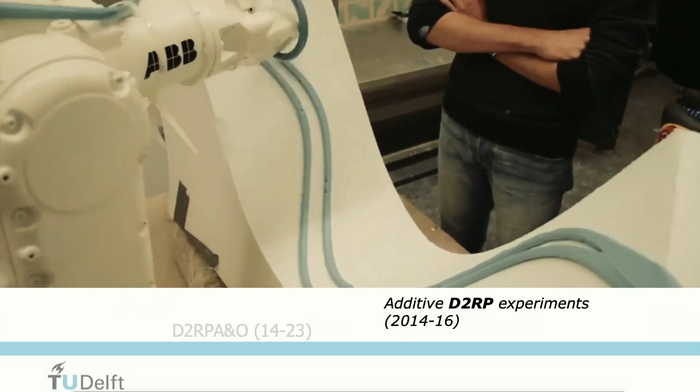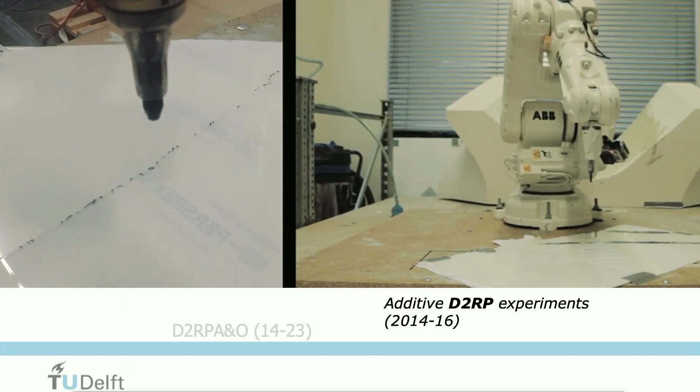But usually what we do, also in this case, we followed the same principle. We selected a fragment of the pavilion, as you can see here, structurally optimized it, and created a Voronoi-based pattern. Here you see a drawing experiment with this first pattern.

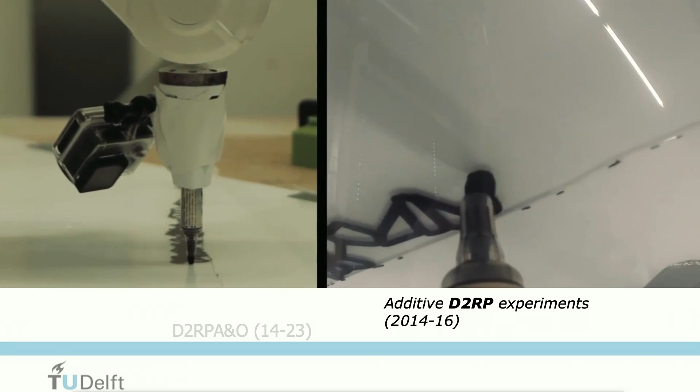You see that the cells, the Voronoi-based cells, are at the moment drawn separately, while when you 3D print, you want a continuous path. So this was the next step, creating this continuous path and 3D printing a one-to-one prototype. This was basically the first experiment that we implemented in robotic 3D printing, and here you see the optimization routine that we implemented.

So why do we use this material design? We use it because it reduces material use and also 3D printing time. But also at the time we were speculating that probably it increases insulation properties, but we didn't know if that's correct. Later on we indeed also tested it, but I'm going to get back to that when we get to the project where we did that.

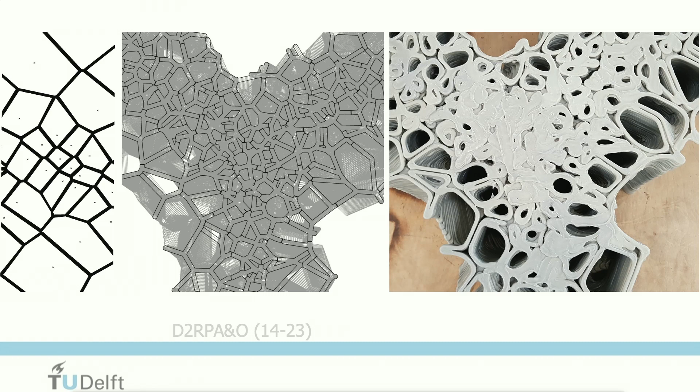So this Voronoi-based material design is very versatile. In this case, we 3D printed with thermoplastic elastomer in collaboration with an industrial partner in Rotterdam, and we 3D printed a chaise longue with variable stiffness. What does it mean? The back of the chaise longue leans back when the user is leaning back.

Again, we implemented the structural optimization and also the material design in such a way that the higher density parts are stiffer than the other ones. Here you see the system that we used for 3D robot printing in Rotterdam. And I think I'm going to go there because the sun is blinding me.

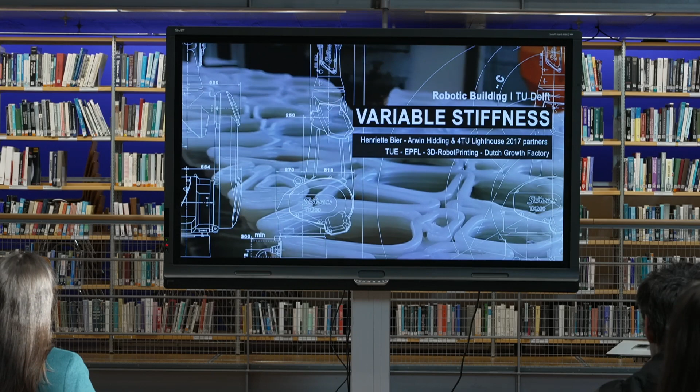Again, we usually use Rhino Grasshopper to develop the design. Here you see the cellular design that we then tested, first on fragments, and at the end we 3D printed the whole chaise longue. So the logic is quite clear: higher densities means it's stiffer.

Here you see the 3D printing process. It took about 30 hours in one go. Here you see the researcher, very dedicated. He spent basically the 30 hours next to the system, and 30 hours including troubleshooting were implemented. And here you see the variable stiffness.

Continuing basically on this line of thought, structurally optimizing, 3D printing certain parts, but also having, let's say, subtractive, not only additive but also subtractive techniques implemented, we developed a project where we worked with curvilinear beams consisting of recycled wood, and we 3D printed the nodes, optimized and 3D printed the nodes.

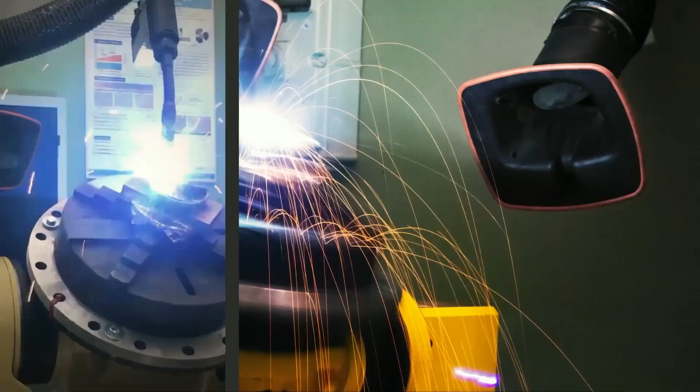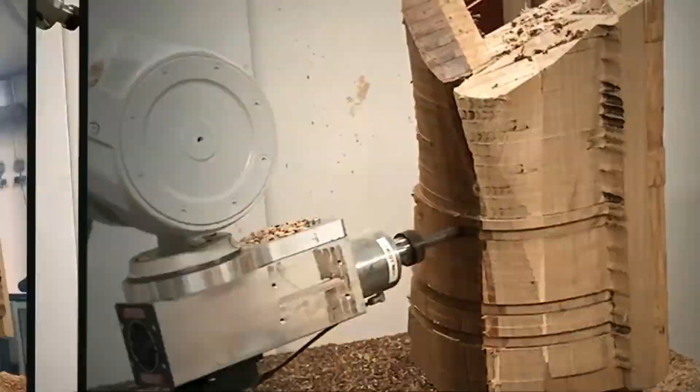So this is still work in progress, but in principle, the technology is, as mentioned before, available here at mechanical engineering. So again, how we did it: we took recycled wood, we glued it together, and then we milled these curvilinear pieces.

Again, it's a fragment, but it has been quite impressive to see that the various pieces of wood, with their different colors and patterns, have an aesthetic quality, I would say.

So what we identified, of course, was that we created a lot of sawdust. So then the question was, okay, if we want to have a complete circular loop, we need to use the sawdust.

And then we developed a project, this one here: planetoid. We call it planetoid because it's a small planetoid that is 3D printed from wood, a combination of wood and thermoplastic elastomer. This project, as mentioned before, was implemented with a landscape architect. The idea was that this cavernous structure is harboring not only animals and insects, but also a ball of earth from which plants can grow.

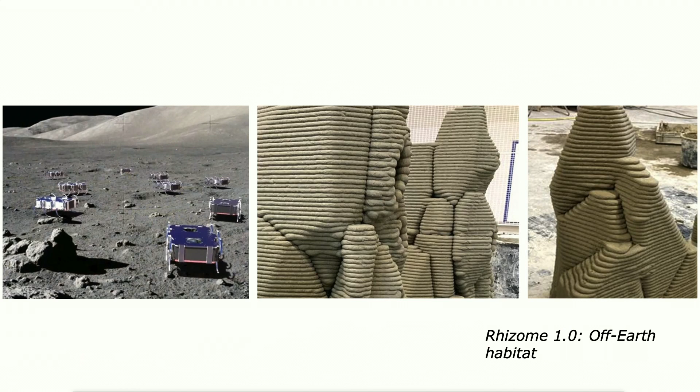Master students actually explored scaling up this approach. They proposed a larger scale urban furniture based on the same principles, where the human would also be part of this environment. So basically the idea is to share these environments with animals, insects, and humans.

Moving towards scaling up, in 2020 we received funding from the European Space Agency to develop a Martian habitat. This was again a bottom-up project because students wanted to participate in this idea competition. I didn't feel quite comfortable, thinking there are enough challenges building on Earth, let alone going to Mars. We don't know a lot about Mars, we know some things but a lot we don't. But the European Space Agency said, okay, go for it. So we ended up developing the idea.

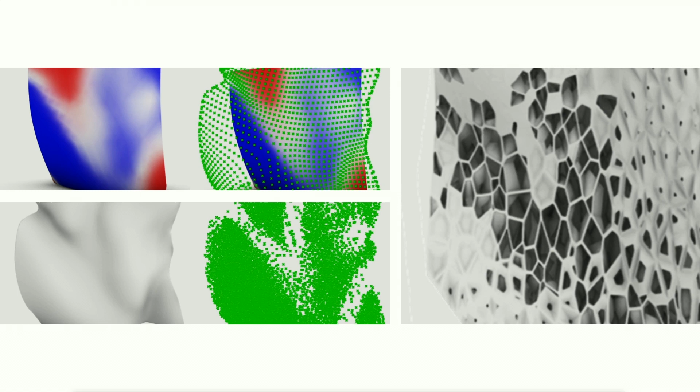Students explored the possibility of using this Voronoi-based design to facilitate various functionalities. As previously shown, we worked again with this Voronoi logic, structural optimization, developing the point clouds and controlling the Voronoi based on this point cloud.

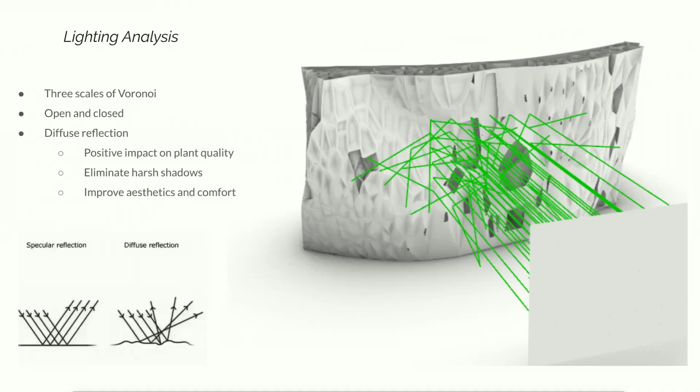In this case we also did a light analysis and developed a system with integrated AI, where the lights would, for instance, follow the movement of the human in space, or change color and intensity depending on the activities being implemented.

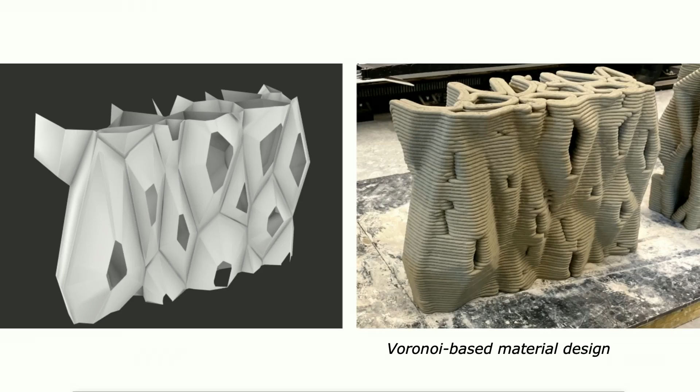Again we focused on a fragment, a component, and this was basically the first test we implemented with the system developed by Vertico in Eindhoven. They are 3D printing large-scale structures, and we used the material they had, a cement-based concrete. You can see the difference between the computational model and the 3D printed prototype.

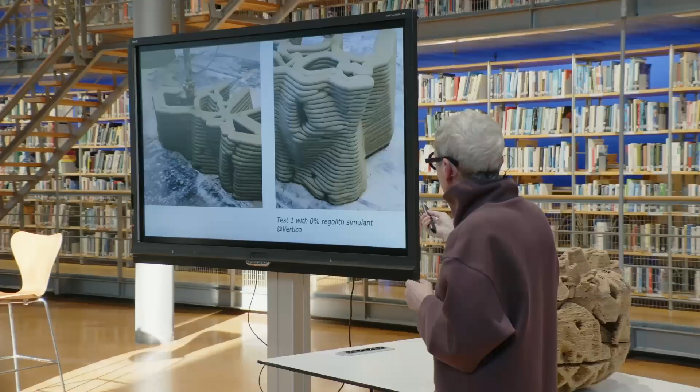This is a very important step, prototyping at one-to-one scale, because you need to establish a feedback loop between the design and actual prototyping. This is the 3D printing implemented at Vertico.

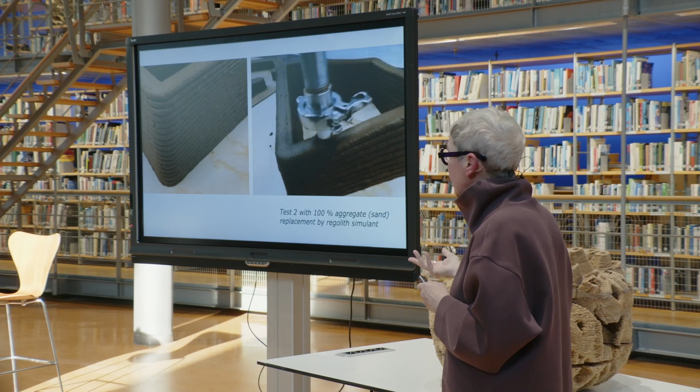And this is now the 3D printing using regolith simulant. Regolith is the material you find on Mars. We tested whether this works, whether we can 3D print with regolith simulant, and what the qualities of this material are.

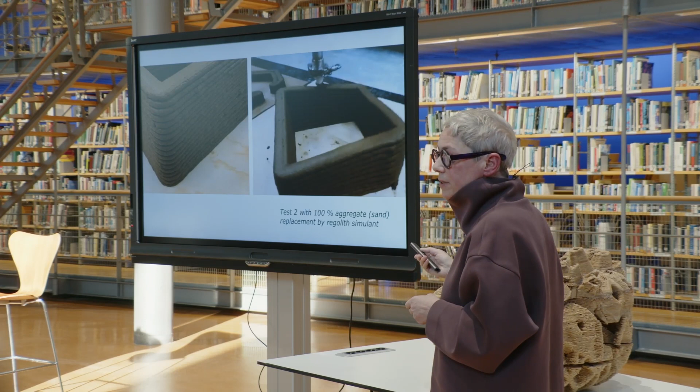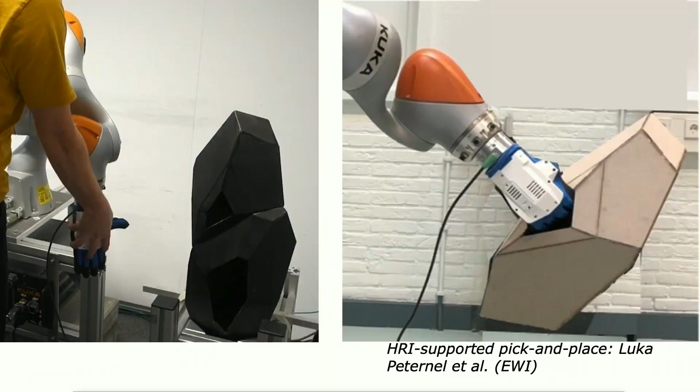Here you see the human-robot interaction approach, guiding the hand. This is a master student. To grab the component: close hand. It gives basic commands like close hand, lift up, orientation, main mode.

In this mode, for instance, it is compliant, so the robotic arm is doing what the human wants. Now it's directed by the robotic arm, down. So there are moments where they work together, but also moments where the robotic arm is doing what it's automatically taught to do.

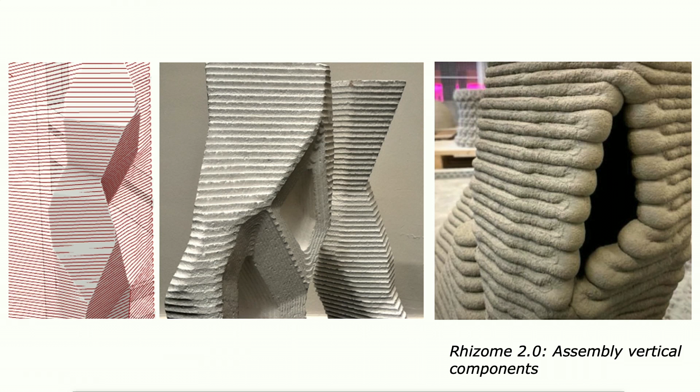This was basically the first assembly of two components. We started with pick and place, then continued with the assembly of two components. This was implemented with Master 2 students, again at the Cognitive Robotics lab.

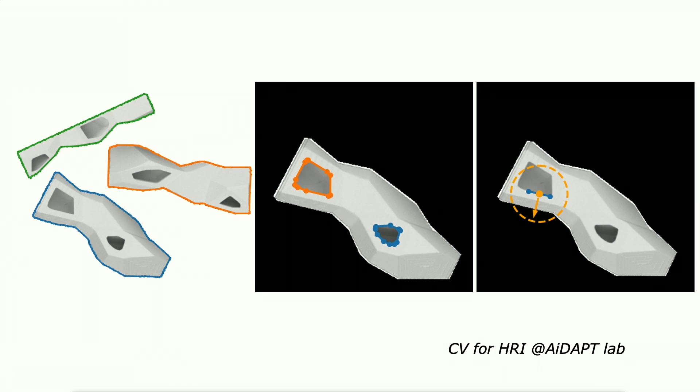We implemented computer vision for object recognition. As you can see, with computer vision we can detect the objects although they have a complex geometry, and we can also detect the grabbing holes for the robotic arm, so that it recognizes where they are and where to grab.

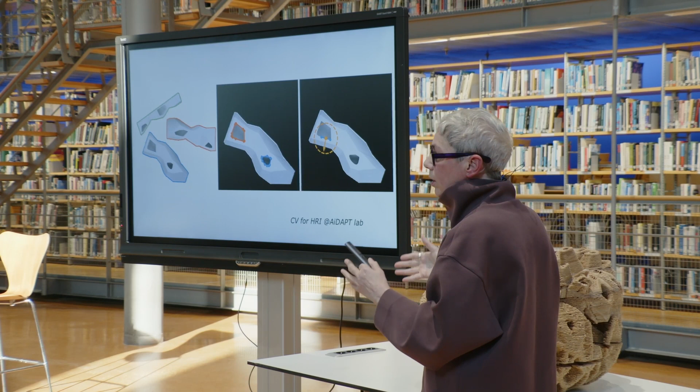Here you see the simulation of the process on one hand, and then the implementation.

In this case, the components were assembled vertically next to each other. This semester, with the Master's 2 students, we are developing an assembly that is horizontal. We expect that by the end of the study, we will have an approach for assembling a whole building.

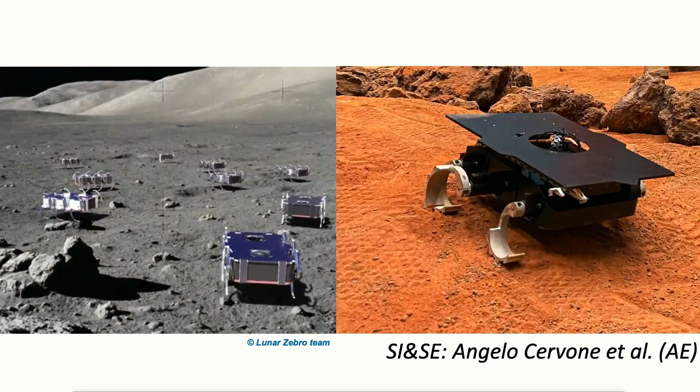The assembly is implemented with Zebro, a rover developed by TU Delft. These are the smaller versions. In our case, the Zebro would be larger, so that we can mount a robotic arm on it, and the various Zebros are equipped to handle different activities. But this is still a work in progress.

The plan is actually in May to go with a Zebro rover to a cave in Sicily. It's a collaboration with the University of Palermo, to scan a fragment of the lava tube, and then use this as a basis for developing the design further.

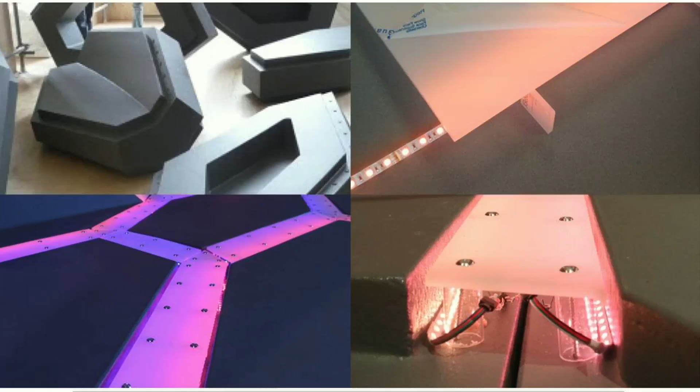We are going to use a technology that we developed already a while ago, and it was tested here in a prototype. The integrated light would change color, would change intensity, but would also turn on and off, and we would be able to control this by monitoring the humans moving in the space and learning. Basically, the system would learn from the humans to adapt over time.

This is actually the demo that we were planning to present here, and unfortunately we ended up not being able to present it, but I have good documentation of it.

The planting in the indoor garden of the habitat is going to also be implemented with a robotic arm. Again, we implemented object detection. In this case, these were flower bulbs, and the robotic arm on one hand can create, so to say...

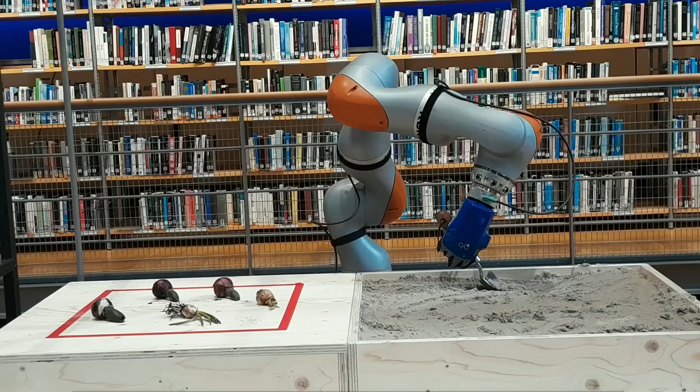For some reason it's not working... Yes, so it's creating the holes, but it's also able to pick and place the bulbs, and in some cases works together with the human for specific task implementation.

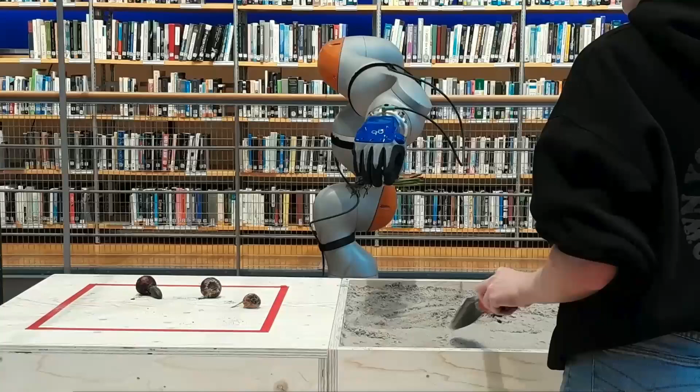This project was implemented in collaboration with the University of Sydney.

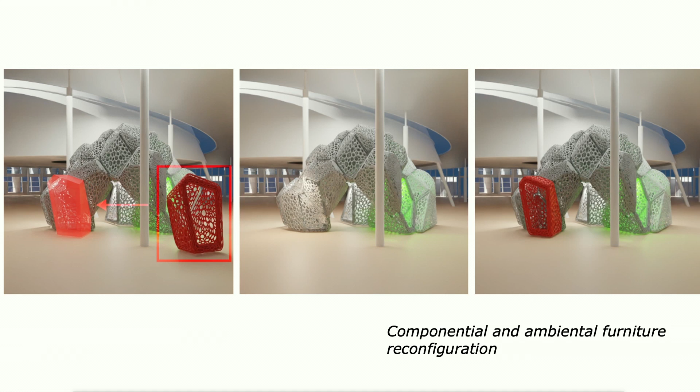To continue this line of thought on design-to-robotic assembly, I would like to present also this componential furniture reconfiguration that we developed for the library. We intend to use the same principles also for the habitat on Mars.

These are porous, 3D printed, lightweight booths that can be taken away from their original location and moved freely in the space.

One of the challenges is that the library wants to have opportunities for various activities taking place at the same time, as happens also now. You see that the students developed a larger structure that could accommodate a group of people, and the smaller booths can be moved.

But one of the challenges is being able to bring them back. So how do you find these booths and bring them back to where they belong? For that, the students developed object recognition. You see the individual booths are identified, and the idea was that with your phone you could identify the Voronoi-based booths and bring them where they belong.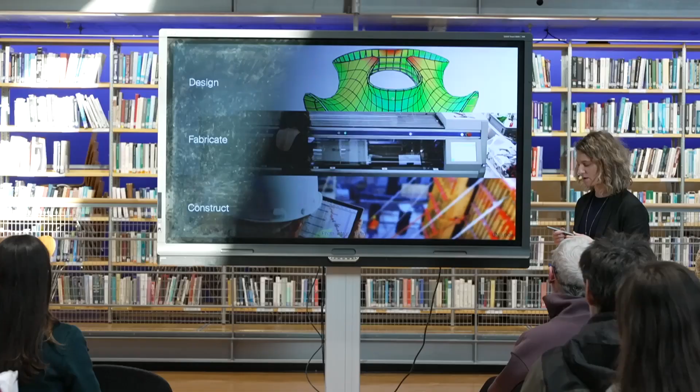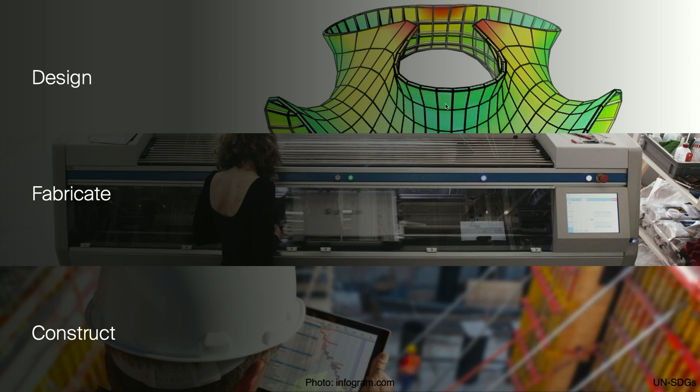That means we usually think in terms of how we might design—we hear that, right? We need to design differently, we need to construct or build differently. The invisible connection between those two is often left not specifically enunciated, and that's fabrication. I put it very boldly in the middle because I work a lot with fabrication, so that's my point of focus in this case. It doesn't mean they are separate—this is something interlinked, so one has an effect on the other. I won't specifically talk about design, but you'll see how design comes back within it usually.

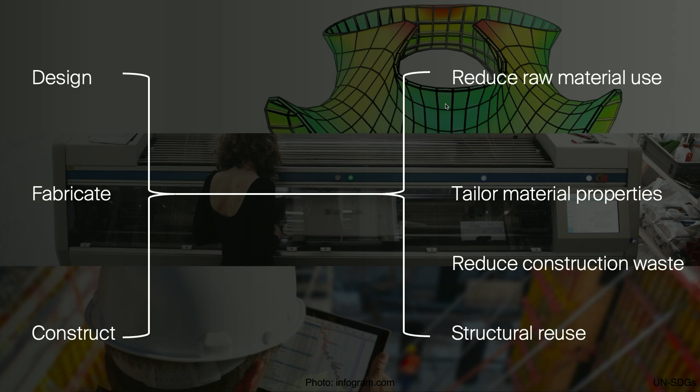The reason we might find it interesting to focus on these three things is because they give us an opportunity to be more effective with our material use, to tailor material properties, to reduce construction waste, and so forth. But the only way we can make that link between those, so we can enable our designs, constructions, and fabrications to do that, is very critically through computational tools, or our little digital robots in this case. So a lot of my work also focuses on those computational tools.

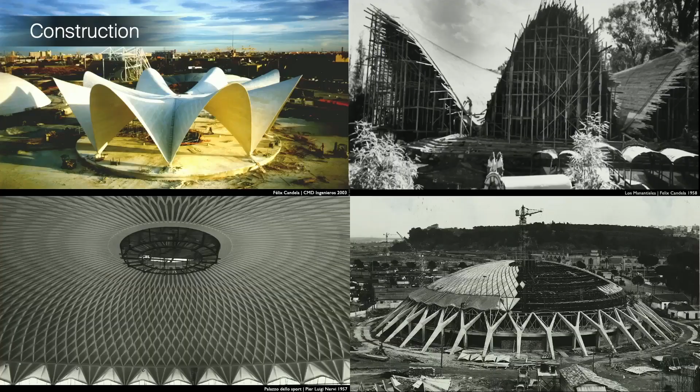If we talk about construction, very briefly, just to put it in context—because I will dive very fast into concrete and how we might do something with concrete—I think about construction as in a lot of the buildings that we have around us. And if we want to be more efficient with our constructions and use less material, we usually can design better forms.

That means that we can have very thin, elegant shapes that span large areas, and they don't use as much material as the ones that we usually construct. Unfortunately, that usually kicks the problem down the line to how we build them.

Because when it comes to building them, that becomes a little bit difficult. So we usually need clunky, difficult molds. And if we want to be a little bit more efficient, we can't just turn a blind eye and say, tomorrow's problem.

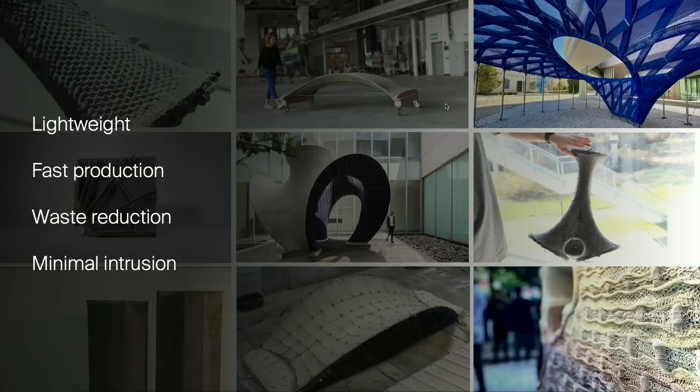So I look at the formwork side of things. To do that, most of the focus is on developing a lightweight fabric formwork, a flexible formwork, which is something a little bit different than the traditional formwork, because it's fast to produce. It could reduce waste, and because it is a flexible formwork that uses a textile, specifically a knitted textile...

I'm sure somebody in the audience will really enjoy this. It means that we could also use it with minimal intrusion. I really appreciate it, don't stop.

Then how this would work really quickly is you start with a design, hopefully a structurally informed design, but whatever design that could work with a tensioned textile. We fabricate a textile that fits said design, then tension that textile in a rig, because it needs to get the shape somehow, and then apply a thin coating to get the formwork.

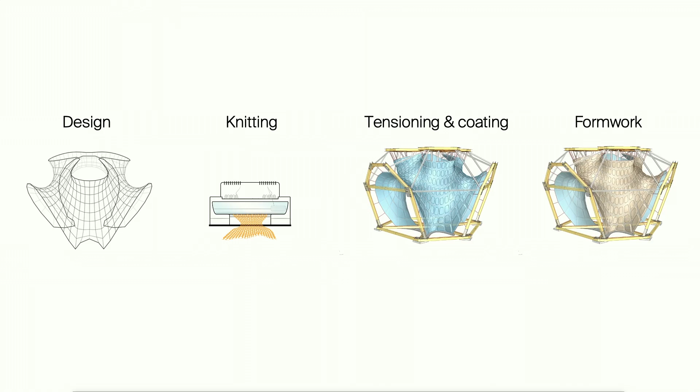Now, the thin coating, particularly for the moment, is crucial, because a knitted textile is very soft. So if you can imagine trying to cast something heavy into it, it's going to deform quite a lot. That's not what we want. That was not the point all along. So that building up of layers, of strength in layers, is what makes it possible to do this, which is why we need a coating.

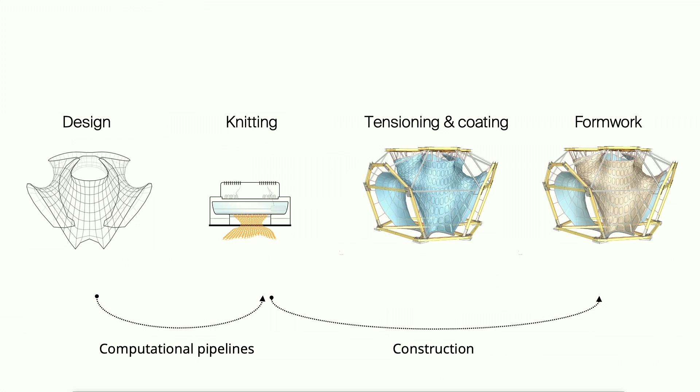Now, there are two challenges to this. The first one is, if we have a design, how do we get to said knitted textile? That is a challenge on its own, and it's addressed through computational pipelines, right? We need to translate that. And the second challenge is, once we do have that textile, how do we actually build with it? So what I'll do is give you a few examples of these two challenges.

I'll start with the second one, so I'll show you how we build using a textile, and then come back to the computational pipelines. So the first example is a pavilion that we built in 2018 in Mexico City. It's called Knit Candela because it's an homage to the famous shell builder Felix Candela, and it's built close to one of his, as an homage to his Los Manantiales in Xochimilco restaurant.

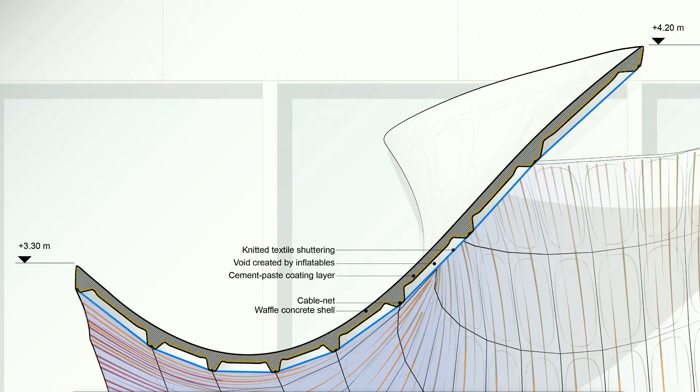So it's one of the shells that you've seen in the previous slides as well. The interesting part about this is that it's a thin concrete shell with rib stiffeners in two directions, so you'll see some cavities here. Why this is interesting is because usually when you need a formwork, we're dealing with two complexities: the global geometry, needing a globally doubly curved geometry, and the local complexity of needing these little pockets of material saving in between. So we're dealing with both the local and the global geometry.

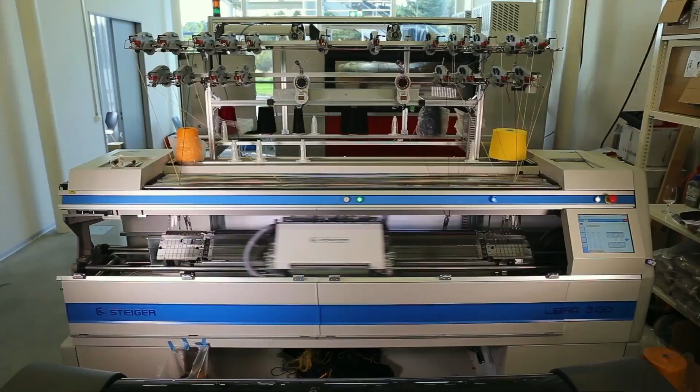The way this was done is by knitting a textile for it. That's what the machine looks like. Because the structure is rather big, we need to segment that, right? We don't have machines that are as big as our buildings. We did it in 4 pieces. You'll see us, me and Lex, that's my colleague, he's going to come back later as a very apt robot.

We put that into 4 bags, vacuum bags, and took it to Mexico in our suitcases. Sure, because it's easy to take it in a suitcase and make a point. Also because we finished quite close to the deadline, so sending it beforehand might have been a bit tougher than one thinks.

On site, those 4 pieces are put together, so you'll see an entire piece over there. We ran cables through them, so steel cables in 2 directions to make a cable network. You'll see it in the next image quite fast. And what you see outside is the frame that was being built to tension the textile in. It looks a little bit like a mess still because it was under construction. Once tensioned with the cables, you'll see cables running along in these directions, vertically and as loop cables around.

Once tensioned, it looked something like this. This image I like a lot for two reasons. One, it shows the lightness of the system, not just because the light is shining through, but because if you were to imagine a doubly curved surface made out of foam or timber, it would be quite filled with supports and formwork inside. And the second, because we hadn't really built something that big with a knitted textile before, we had reason to believe it would stretch to that size, but we didn't know for sure. So this is a moment where you say, okay, good, it worked, so far at least.

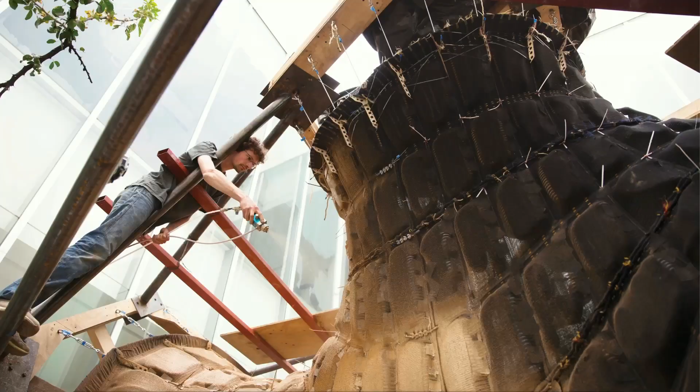Once tensioned, we filled up pockets that were put in the textile with balloons. Clown balloons, because we're funny sometimes, and we don't take ourselves too seriously all of the time. And started applying the specially designed cement paste coating.

And I promised you would see Lex come back. Lex was my colleague at the time, and he is the concrete magician, the one who came up with the very special formulation for that cement paste coating so it would work in an outside environment. You can see him applying that in a very automated manner from a scaffold. Once coated, it looks something like this. All of the ridges you see between those pockets become the ribs in the concrete, and then the rest becomes the concrete slab.

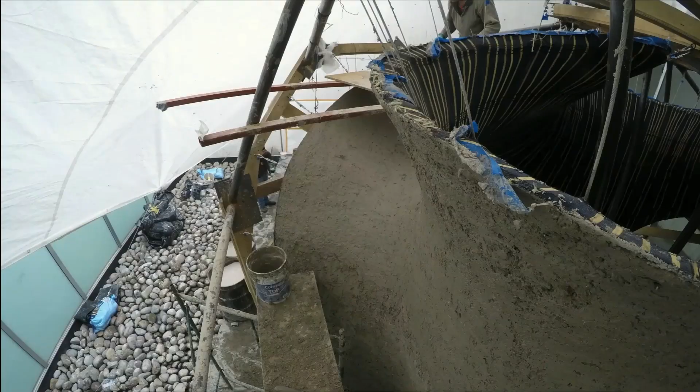With this, then concrete could be applied, and you'll see that this is done also in a very automated fashion, but using very skilled local craftspeople. That's because we were in Mexico City, where there is a long-standing tradition of having good concrete workers, so they really know how to make this very, very beautifully. Although I don't have the next image, but you saw the first one, I would say that Felix Candela probably would have been jealous of the finishing that they managed to give to the concrete. Once concrete is hardened, you can take the scaffolds or the supporting frame off, and you're left with a structure that has concrete on the outside and the textile on the inside that's not removed.

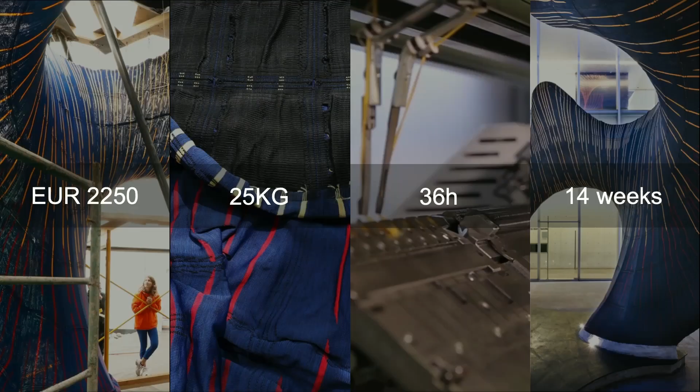Some of the takeaways from this project: for 50 square meters of formwork, including the textile, the cables, and all the connectors, but not the timber frame, it cost around 2,250 euros. The textile weighed about 25 kilos, so it's really lightweight compared to any other type of formwork. The cables and so on were another 30 kilos, so 55 kilos carried 5 tons of concrete in the end. It took about 36 hours of machining time, which is funny because I heard you say 36 hours for the other one, so I was thinking, that's nice - those are just coincidences.

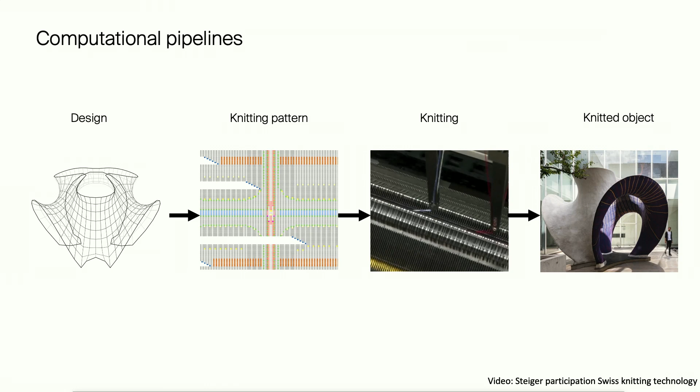And this is where we get to the fabrication side of things, the computational pipelines before - we have a machine and we need to instruct it. Usually these machines create things that are the size of ourselves, like clothes or shoes, parts that are about this big, meaning the instructions at that scale are also easier to make. But if we want to move to a construction scale, something that is a bigger building, then we need pipelines that automatically translate a design into those patterns that can be fed to the machine.

And without that, we wouldn't have that type of productivity. This is not only interesting for us - it's also interesting for the machine manufacturers, because it opens up an entire new sector for them. Whereas they were always in the fashion industry, now they might have a leg to stand on in the construction industry. It's going to take some time, but they might have one.

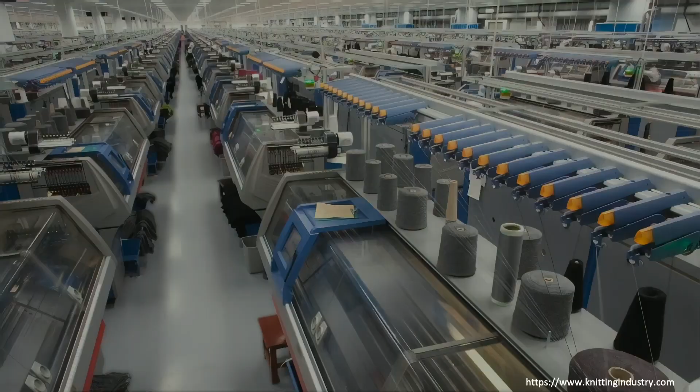Although we show the machines all the time as one, because we happen to have only one to make these projects with, the truth is these machines are out there all over the world in factories, in huge factories, in large numbers. So if we know how to generate those instructions for them, we don't even need to take textiles in our suitcases or trucks or whatever else. We can just send the instructions and have them be produced locally.

I took a little bit of time explaining that project, but I wanted to show you a second one, which is an evolution of the first one, in terms of scale, and you'll see how that comes back for the computational tools. We built this one in 2022. It's called Knit Nervi - you see a pun, knit everything. But Nervi, in this case, is a homage to Pierluigi Nervi, and the structure that we echoed here is the Palazzetto dello Sport, which was about 200-300 meters away from where we built this structure.

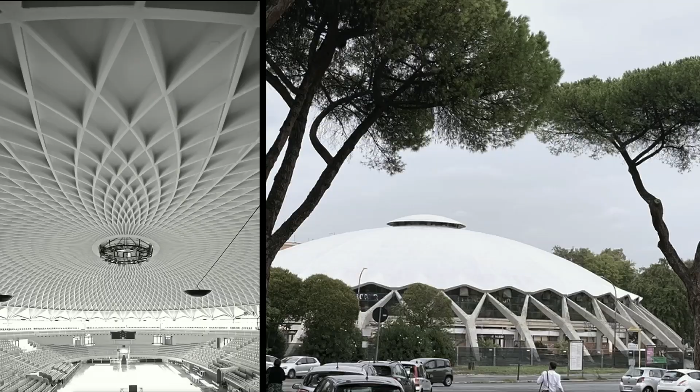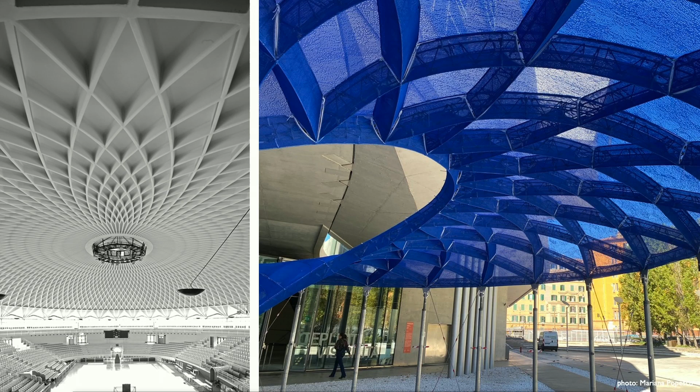What you see here is, again, a type of shell structure that has a nice diagrid ribbing in two directions. These types of things might be a little bit more complex to build just with standard repeating units. So we reimagined that geometry, but it works in the same way. And we wanted to also bring it a little bit closer to what industry might recognize as something useful.

If the first one, you might think, it's an artwork and it's a doubly curved shape in general - this one is trying to address industry a little bit closer. Doesn't mean it's completely close. But what you'll see is that we have prismatic sections that are recognizable with straight edges. And we've also introduced reinforcement, which you'll see a little bit in the rebars, as an X-ray through that structure.

What we also tried to do with it is reduce the amount of external support needed. So that wooden frame we had before, you would rightfully claim, yes, but that's a one-off waste - we agree. So how could we do that with even less external support? It looks small because the pictures are either aerial or in front of the MAXXI Museum, which is huge and dwarfs anything around it, but it's roughly twice the size of the previous structure - 9 meters in diameter and about 120 square meters of textile, just to give you the range of it.

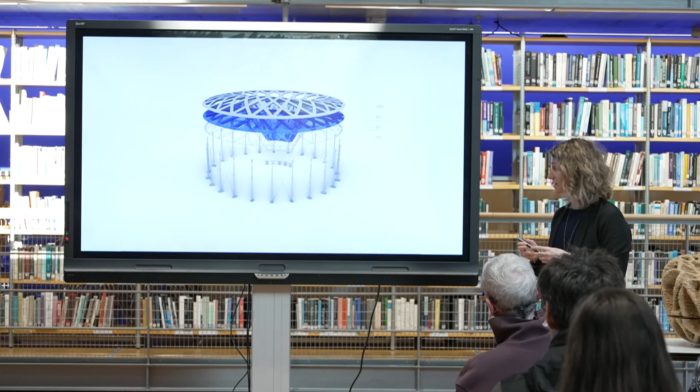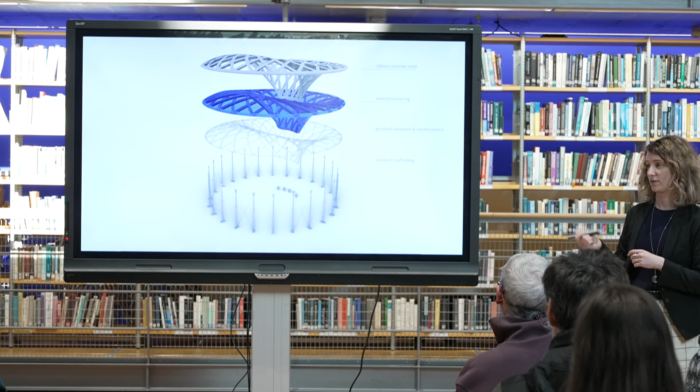In this case, what we set out to do is have the rebar cage, as a bending active grid shell, be the part that stays within the structure, theoretically fulfilling a structural role, but also actually being the scaffold to hold up the textile, so you don't need an external one. That internal scaffold holds up the textile, and we would cast only into the ribs of it. The only not-used part of the scaffold are those props you see over there, but those are standard formwork props, so they can be found with any contractor and given again for any other project.

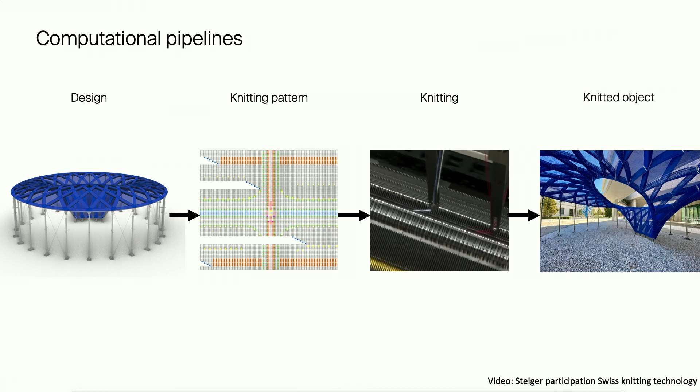Now, what we did is we built first the bending active grid shell, so you'll see it here. We then created all the knitted pieces specifically for that structure. I'm bringing this image back because I wanted to highlight that this means we need a better evolution of those computational tools, because we're making a bigger surface, so it takes a little more time. We need to make sure we scale up those systems with the scaling up of our structures so that they don't become a bottleneck.

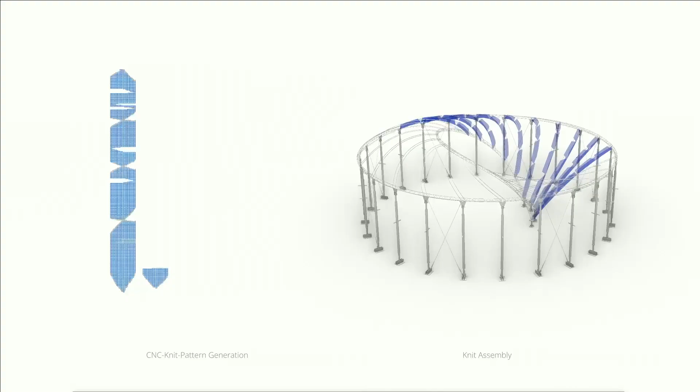You'll see a little video that shows a snippet of these types of patterns given for the machine, and you'll see that there are a lot more pieces. So the segmentation of the building, in this case, is a little bit different than the previous one.

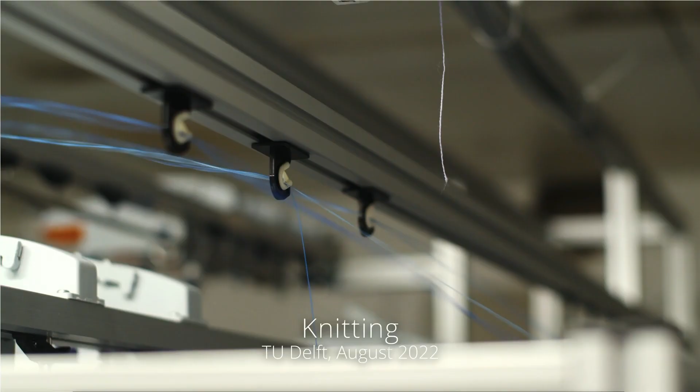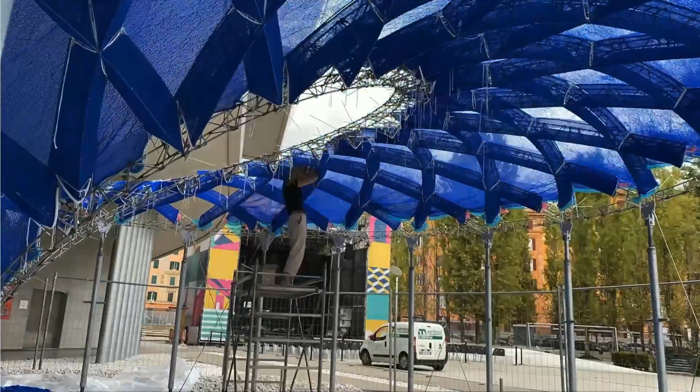You'll see it working. So that's again the same type of machine, but this time at TU Delft. You'll see all the pieces that were being put together, and again they fit in a bag. So we take it to site because we can still fly to Rome.

On site, you'll see that these types of systems are easy to assemble, sometimes by one unskilled laborer, very quickly. So in the end, it looked something like this, and you might note that we didn't cast any concrete into it. The reason is twofold: one, we've already shown that we can, so it's not necessarily the first thing we need to show. Second, it was a temporary exhibition, meaning it was going to be there for 5 months. So if we want to showcase a type of formwork that's very sustainable, casting something temporary in concrete is not the best way to go.

That being said, it would have been nice to really test it out all the way. So what we did instead is make it fully disassemblable. All of these pieces are not sewn together or anything else; you can also take them apart. So at the end of the exhibition, this was disassembled. It has not been reassembled.

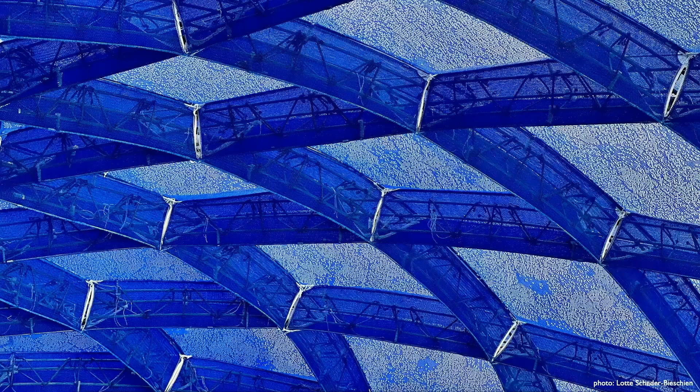The last thing that comes back to the materials across scale, and again to the computational tools, is if you look at the diagrid in between those beams, which was not meant to be cast with concrete for this, so it's actually not serving a structural purpose, you'll see that it's not a uniform material. It's a graded material with different densities. And this was one of the parts, although in this case it's an aesthetic one, that we needed to be able to show, both in terms of computational tools, that you can actually control that material placement at that level, and control that within the fabrication process as well, not only within the design process.

So finally, because I think I'm speaking way too long, I want to stop, I wanted to show you what kind of brings these together. Because I've shown you a lot of non-automated versions where we look at scale, since we're trying to look at those computational tools. But in this case, we built a small bridge together with colleagues from TU Munich and Braunschweig, because they had a unique set of complementing skill sets.

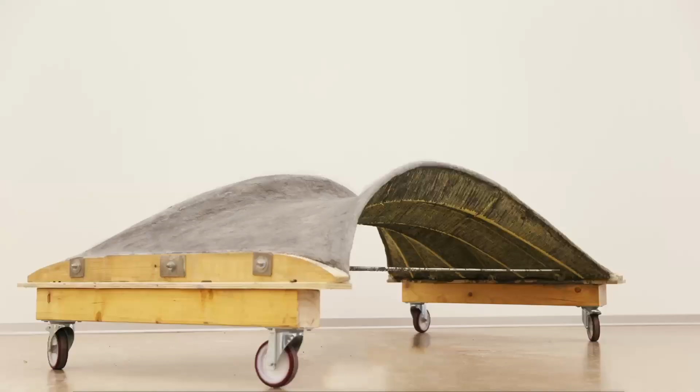We started with a small concept bridge that I had built in the beginning, which really didn't count as a bridge because it's 1 by 2 meters, so nobody believes it's a bridge. But we scaled that up to 5 meters, and we also took the opportunity to make it an educational trip. So we put together students from TU Delft, TU Munich, and TU Braunschweig, and you'll see them happy and tired after having tried to put this thing together.

It's also an experiment in how we get to work with these systems, because in this case, although it's a way smaller project, things didn't go quite as perfectly, and you'll see that we needed to react to that on site, with people also learning the system.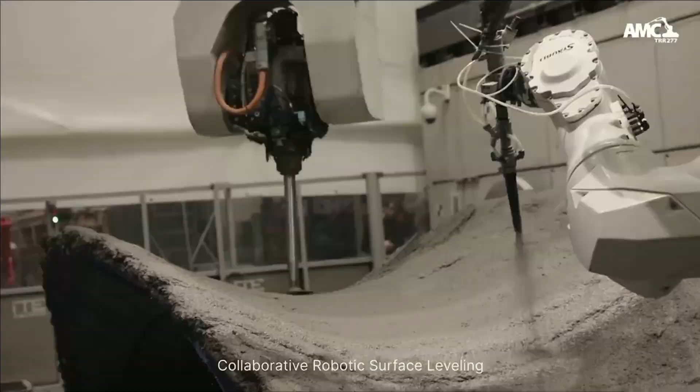In this case, we no longer have legs hanging from a scaffold, but robotic arms hanging from a gantry, adding the first layer of the coating. The second one is a little hard to see, but the reinforcement is fiber wound around pins. And finally, the last layer of concrete is also added with a robotic process, a collaborative robotic adding of material and finishing of that structure. This really took advantage of our colleagues' facilities, because they're really good in Braunschweig at doing this, and they have a very nice facility for it.

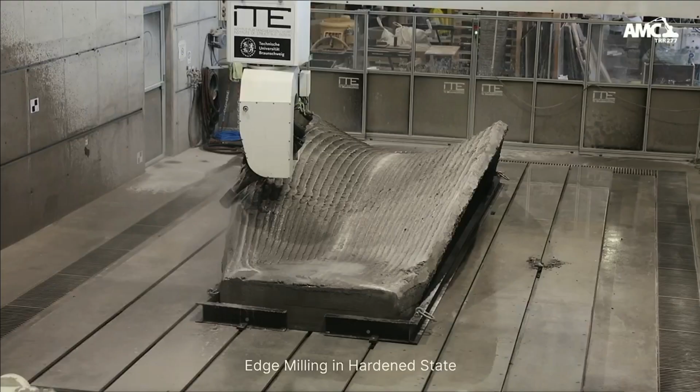So now, because I don't have my laptop in front of me, which is what I would normally use to click forward very often, I'll click forward a few times and skip over a few projects, since I think it's taking a bit too long. But I wanted to come back to the global perspective. So what we're trying to do is look at efficient, deployable, flexible formworks—how we might be efficient not only at the global scale, but at the graded material scale, really looking at the material.

If we are looking at the material, how could we look at hybrid systems or deployable systems? How could we look at different materials integrated into one? And what does that mean for how we construct things? So how are those fabricated in an automated way?

This means we need computational design for both the global geometry and the local geometry. We need computational pipelines for fabrication from that design, both in terms of how we might make a textile, but also in how you control that robotic arm to place material where you want it. And we also need to be able to understand what our materials do, because we might have the power or the capacity to make or design whatever materials we want, but that doesn't mean that we know how they behave, and that is one of the big chunks of closing the fabrication-aware design loop.